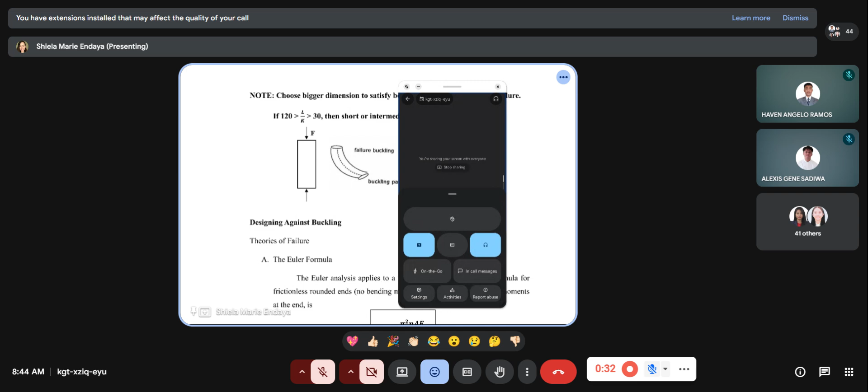Okay, so ngayon naman ay dito tayo sa torsional. Napaparinggan po ba ako? Clear po, ma'am. Okay, so dito naman, ang atin na naikot yung body.

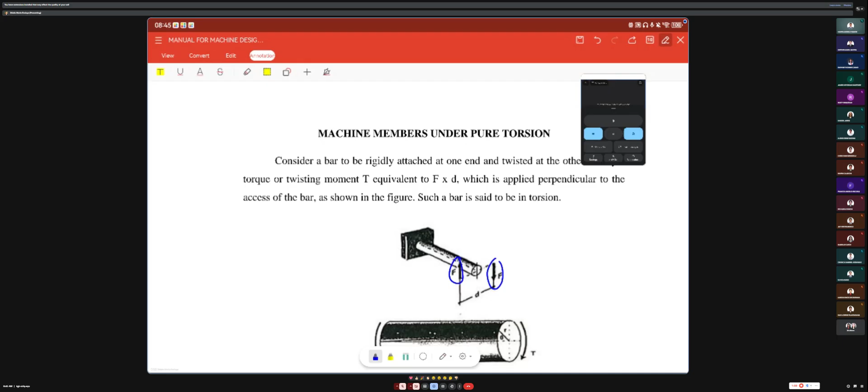So consider a bar to be rigidly attached at one end and twisted at the other end by a torque or twisting moment, equivalent to force times distance. Yung ating force ay couple, magkabilaan with the same amount or same magnitude, and which is applied perpendicular to the axis of the bar as shown in the figure. So such a bar is said to be in torsion.

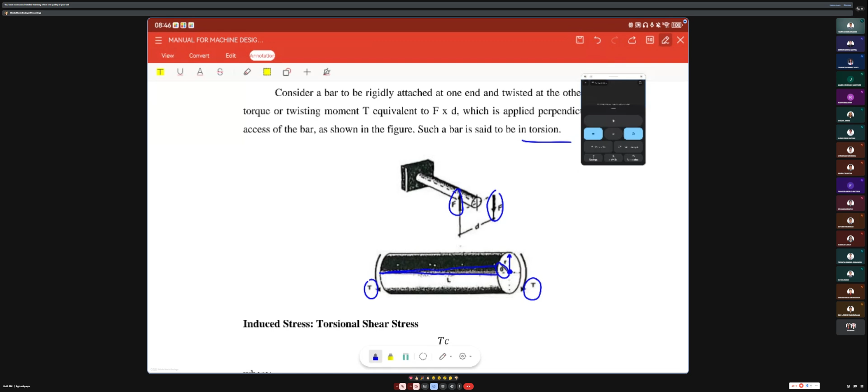So kapag natin yan, kapag twist natin, dito magkakameron tayo ng deformation. So given ito, yung T natin is the torque, then yung length of the bar or rod, tapos itong angle na ito, yan yung ating theta. Tapos yung R naman, edi yun yung radius ng bar. Okay, so dito we have the induced stress formula for torsional.

Ang gamit na po natin dito is yung shear stress, o kaya yung kung tawagin natin ito ay tau. So shear stress is equals to TC over J. T for torque, C for the radial distance, and J for the polar moment of inertia.

So then, meron din tayong design stress. Ito yung i-equate natin mamaya. For a good design, equate natin yung induced stress dun sa design stress.

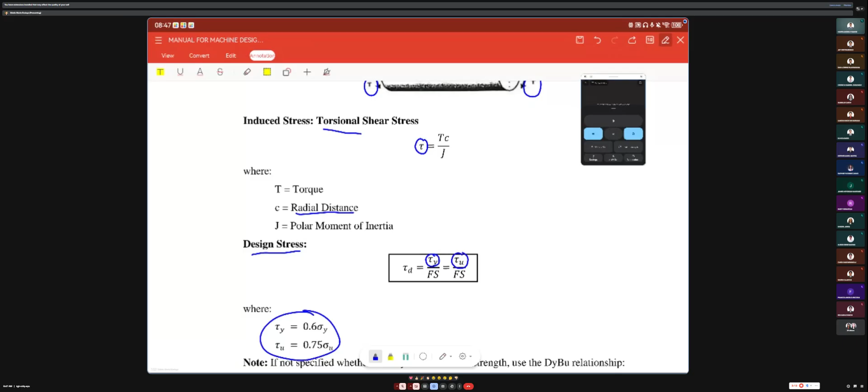Kung dun sa previous natin na topic, yung tension and compression, ang gamit na natin ay shear stress. Ang relation ng shear stress doon sa ultimate stress or yield stress is that ang atin na yield shear stress is equals to 0.6 stress Y, o ito naman na ultimate shear stress is equals to 0.75 stress U.

So ito tatandaan natin. Kasi yung table, ang pwede lang natin doon makuha ay itong ultimate at yield stress. So kailangan pag ililipat natin siya to shear stress, gagamitin natin ito.

So note that if not specified whether to use yield or ultimate strength, use DYBU. Ang ibig sabihin po ng DY? Kapag ductile, use yield stress. Kapag brittle, use ultimate stress. Nagigets po? D Y, ito ay ductile. Ito naman ay yield. Ang B for brittle and U ay ultimate.

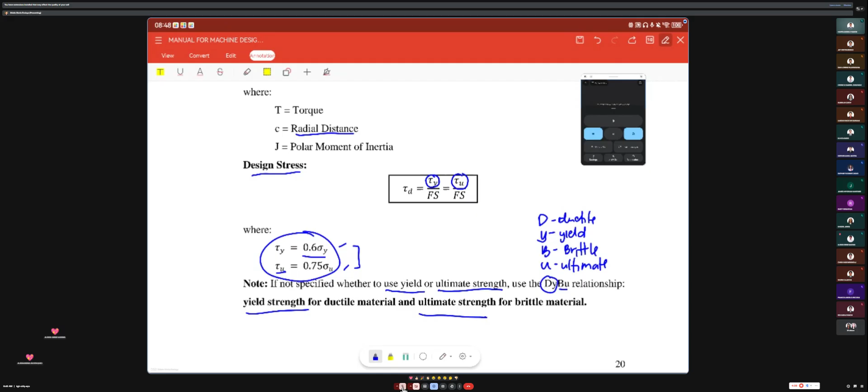If not specified sa problem. Nakukuha po ba? Yes po ma'am, nakakukuha po. Okay.

Next, strength failure. For a good design, equate nga natin yung design stress sa induced stress. Ang ating induced stress for solid materials, so we have the TC over J. C since radial distance or yung radius, so D over 2. And ang polar moment natin is pi D to the 4th over 32.

So kung isi-simplify natin ito... yes, hindi nagsasagot. Good morning po, ma'am. Wala pong naka-present po.

Okay, so yun nga, ang ating C is equals to D over 2 and J is pi D to the fourth over 32. So simplify lang naman natin yan, kasi ito ay magiging T, then C, D over 2, then ang J, pi D to the fourth over 32.

Okay, so simplify natin, di ba ito, makakancel ang D, magiging ito ay magiging 3. Then yung 32, magiging ito, di ba yan? Yung 32 divided by 2, edi ito ay magiging 16. So kaya 16T over pi D cube.

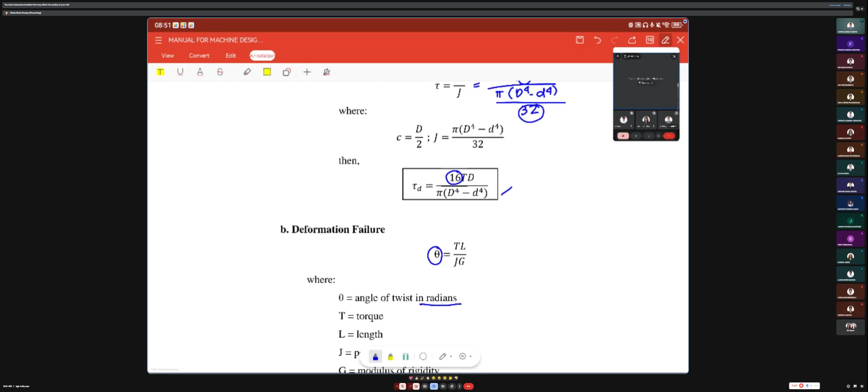So next is the deformation. Yung angle, yung angle of twist, dapat siya ay naka-radian. Then ang TL, T for the torque, L sa length, original length, J, polar moment of inertia, and G is the modulus of rigidity.

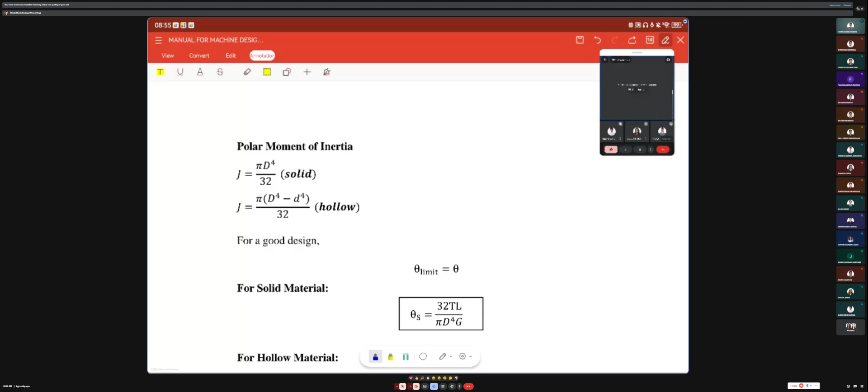So, patayin tapos yan. Ang formula nga natin ng deformation is equal to TL over JG. Yung J, ito naman yung kanina natin. And then, for a good design, ganun lang din, yung ating na deformation limit is equal to the deformation na ito, TL over JG.

So for solid materials, ang ating na deformation ng angle of twist is equal to 32 TL over pi D to the fourth G. Ito ay manggagaling ito, iyan naman ay dahil din sa J, yung J for solid materials.

Tapos for hollow materials, palagyan na lang ng parenthesis ito, itong D to the fourth minus small d to the fourth.

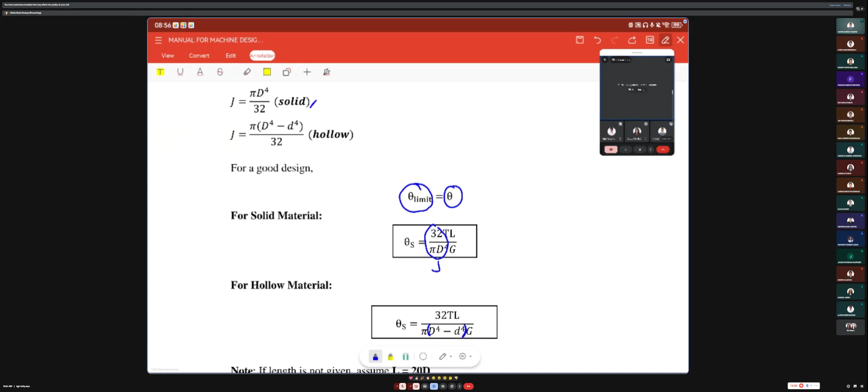If length is not given, assume L equals 20D. And if not in the table of properties, use G equals 12 times 10 raised to 6.

So the power formula, we use this in computing power, or when finding torque given the power and speed. These are our units in SI: power is in kilowatts, torque is in kilonewton-meter, and N is in RPM. So if power is in kilowatts, N is still in RPM. But we use this formula: 2 pi T N over 60.

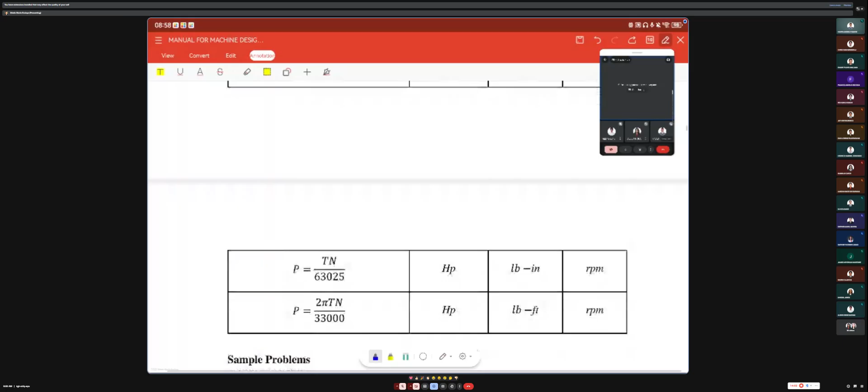For English units, we use 2 pi T N over 33,000. This is what we commonly use. Here the unit for power is horsepower and N is RPM. So torque is in pound-feet, then we convert the feet to inches later. That's how it's done.

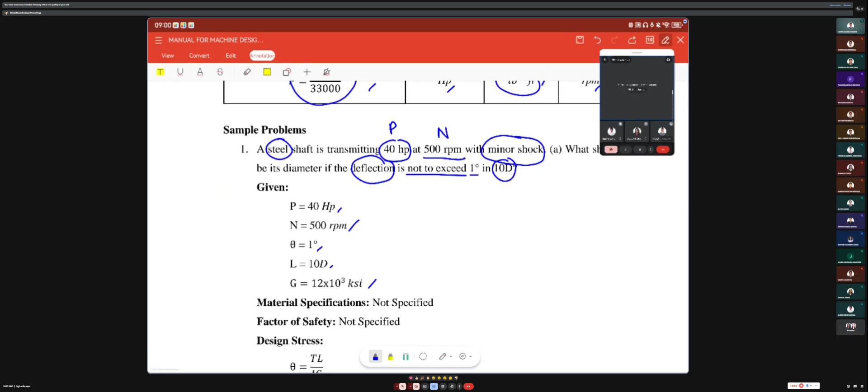Our limit for deformation or angle of twist is 1 degree. Then it's stated that length is 10D. G is 12 times 10 since it's not stated in the problem, so we use 12 times 10 raised to 6 PSI or 10 raised to 3 KSI.

So we need to find the diameter, capital D. Material specification: nothing specific stated, but it's steel, so no specified characteristics. Next, design stress: from the given, we can use our formula, angle equals TL over JG.

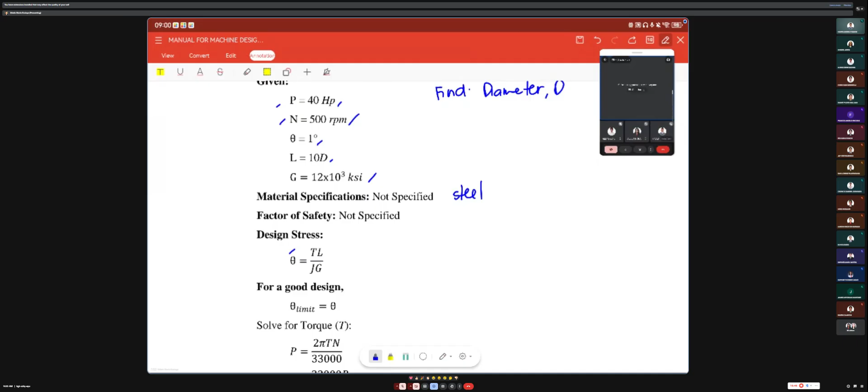For a good design, we equate our limit, which is 1 degree, to TL over JG.

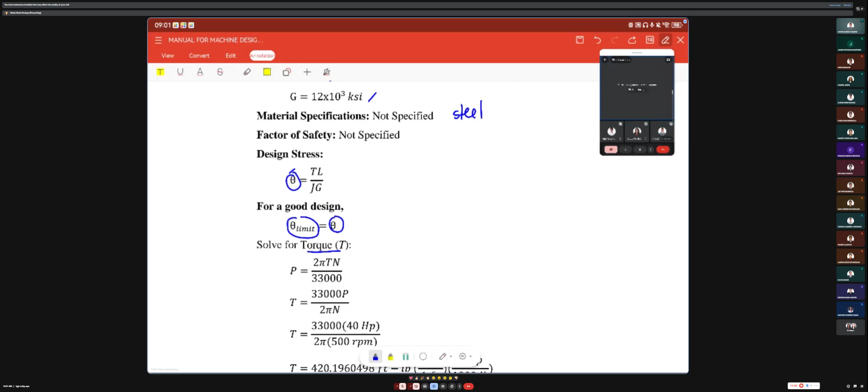So let's compute the torque first using the power formula: 2 pi T N over 33,000, since we're in English units, and given is HP. So T equals 33,000 times P over 2 pi N. That's 33,000 times 40 HP over 2 pi times 500 RPM.

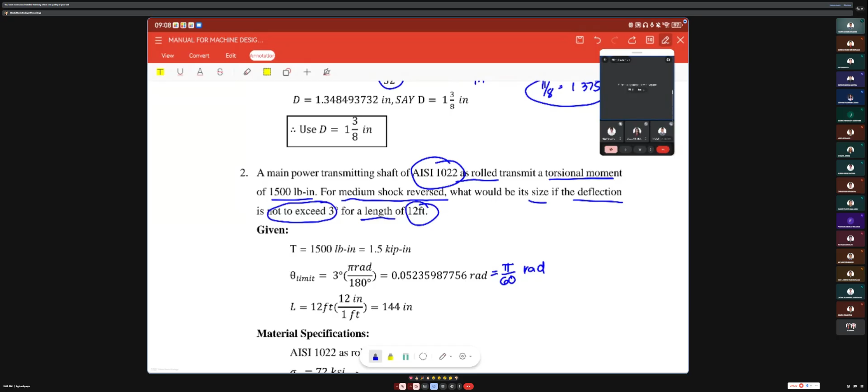Tapos, yung ating na length is 12 feet, so convert natin to 144. So, find size. Or ang size na tinutukoy dyan ay yung diameter.

So, material specifications, AISI 1022 as rolled. So, titingnan natin sa table. Ano? 1022.

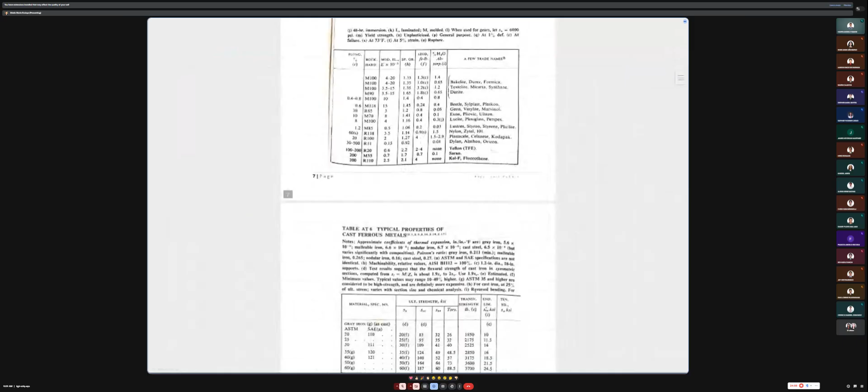Nag-represent pa ang screen. Yes po, ma'am. Nagpe-present. Sana wala kayo sa screen.

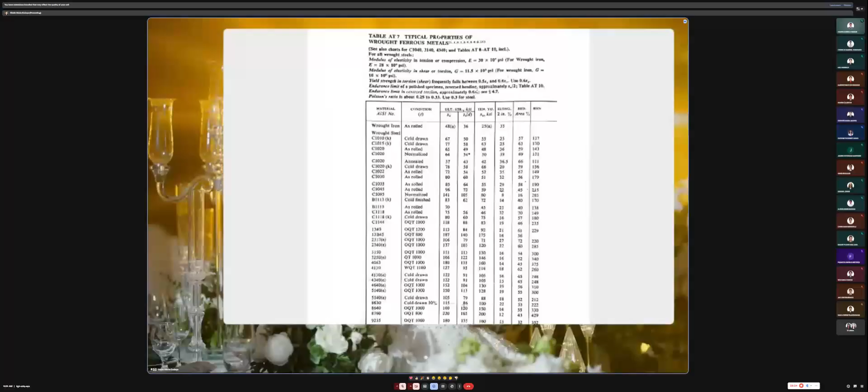Okay, so sa table, so nandito yung AISI, ano ang tinatanong? AISI 1022. Ito yan.

C1022 as rolled. So, ang ultimate stress natin is 72. Then, 52 ang yield stress. Nakita po ba?

Tapos, sinabi dito, makikita niyo rin, modulus of elasticity in shear or torsion. Yan, so kapag sinabi natin modulus of elasticity in shear, tapos torsion, yung modulus of elasticity. So, G is equal to 11.5 times 10 raised to 6 PSI.

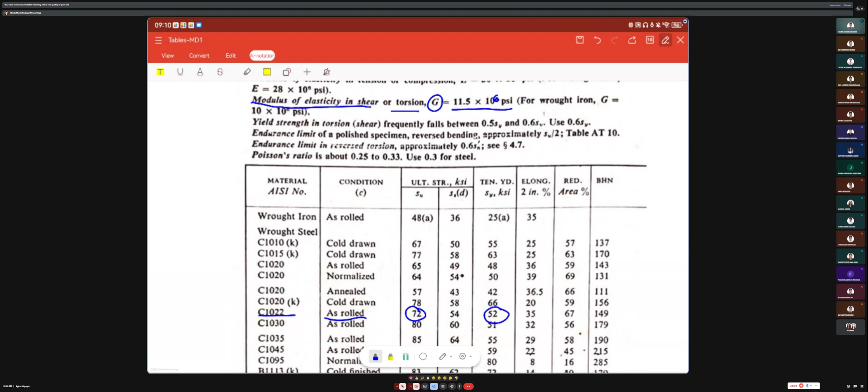Anong page po yan sa inyong table? 15. 15 po, i-correct nyo na ng bilang. Okay, so gagamitin po natin yan yung 72, 52, and 11.5.

Okay, so yon. And then, the factor of safety. Factor of safety natin, sabi medium shock reverse, then ductile because yung 22, then based on yield stress. Wala kasi sinabi sa problem, pero sabi na natin, not stated, gamitin natin yung relation na SY, SU. So, since ductile, so based on yield.

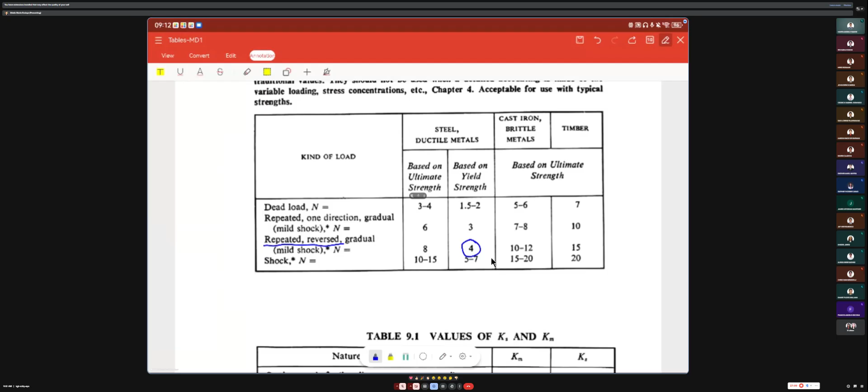Sa table 1.1 ninyo, ano po ang ating factor of safety? Sabi ay repeated reverse, so kaya kung based on yield strength, ang ating factor of safety is 4. Nakita po? Nakita po, ma'am. Talaga.

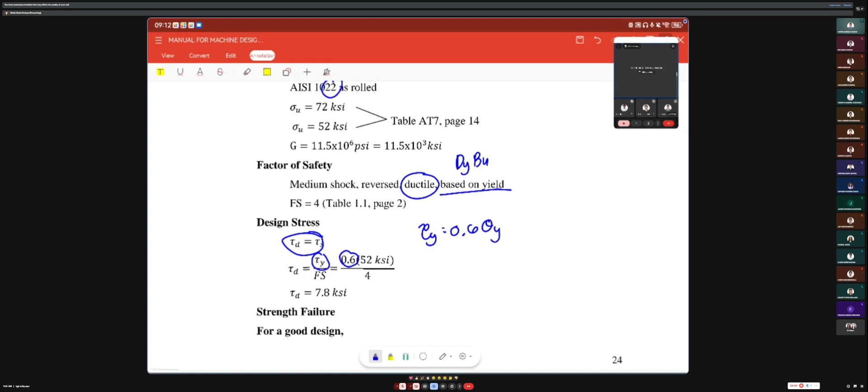Okay, so then, design stress. Equate naman natin itong design stress D equals sa ating na stress. So, since naka-base tayo sa yield stress, so tau y over Fs. Ang tau y na is equal to 0.6 stress Y, yield stress, yung relation natin. Kaya meron tayo dito ng 0.6 times yung nakuha natin yield stress na 52, divided by 4. So, we have now yung design stress na 7.8 KSI.

Sunod, strength failure. So, for a good design, ang design stress ay equals to 16T over pi D cubed. So, i-equate na natin yung design stress doon sa torsional stress, which is ang design stress ay equal sa yield stress over Fs. Then, ang ating naman na tau ay equal sa 16T over pi D cubed. So, pag pinag-equal natin, ito na for solid material.

So, yung nakuha natin kanina na value ng design stress, 7.8 KSI or kip over inch squared, equal to 16. Then, ito naman ay given. Then, D cubed, so cancel ang kip. So, ang D, ito po ang nakuhang value ng D. Tama ba? Ang value?

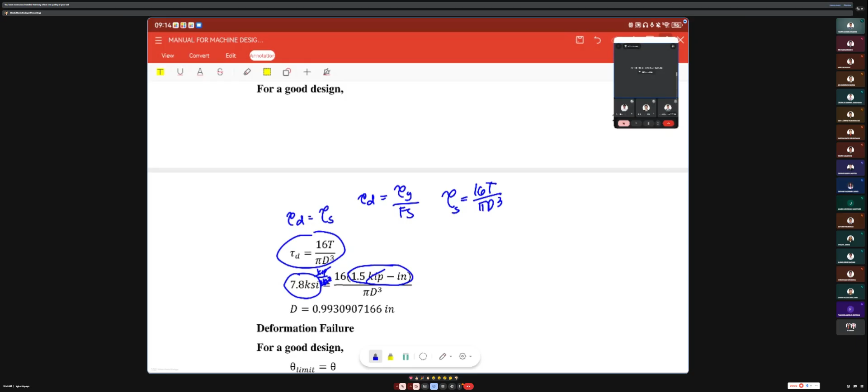Yes po, ma'am. Okay. Then, to the deformation failure for a good design, tignan natin yung limit. Ano? Doon sa atin na TL over JG.

So, we have yung atin na pi over 60 rad, which is 0.052 something. Then, TL over JG. So, T is 1.5. Ang L natin from 12 feet, pwede naging 144 inch. Then, ang J natin na pi D to the 4th over 32. Then, ang G nga natin, yung galing din sa table, is 11.5 times 10 raised to 3 KSI. So, cancel ang G. So, D, anong value ng D?

Oh, anong value? Tama po ba? Tama daw, baka may maling mga decimal ulit mo. Okay, so dalawa yung nakuha nating value ng D. So, choose higher D, which is ito.

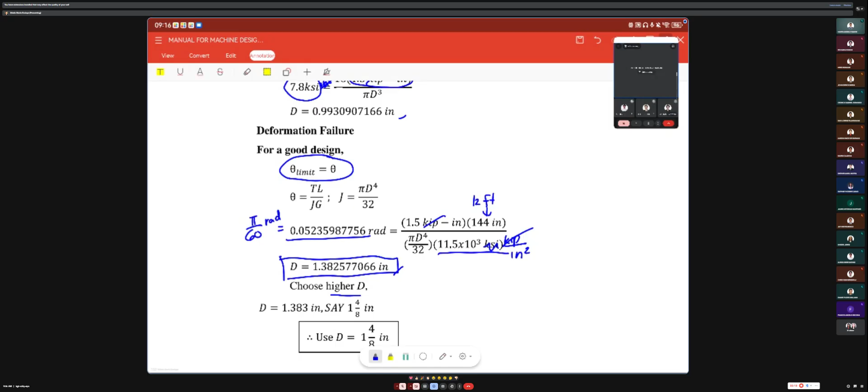So, again, anong gagawin natin? Dito ulit sa papatak sa 1/8 between 7/8. Kanina, nakaano na tayo ng 1.375. So, ituloy na lang natin to. 11/8 plus 1/8, so 3/2 na. 1.5. Ano sagot natin?

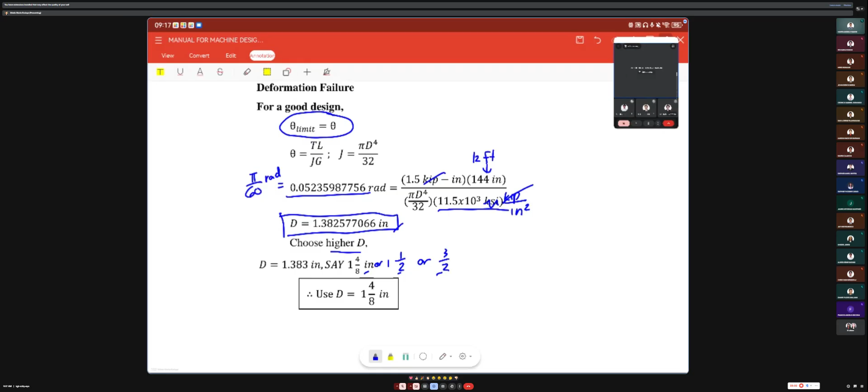Okay? One. Wait lang.

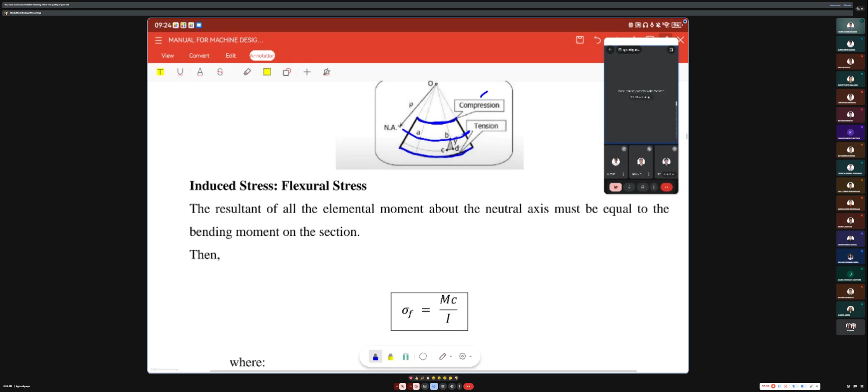A little consideration will show that when a beam is subjected to bending moment, the fibers on the upper side of the beam will be shortened due to compression, and those on the lower side will be elongated due to tension. So it may be seen that somewhere between the top and bottom fibers, there is a surface where the fibers are neither shortened nor lengthened - that's what we call the neutral surface.

The intersection of the neutral surface with any normal cross-section of the beam is known as the neutral axis.

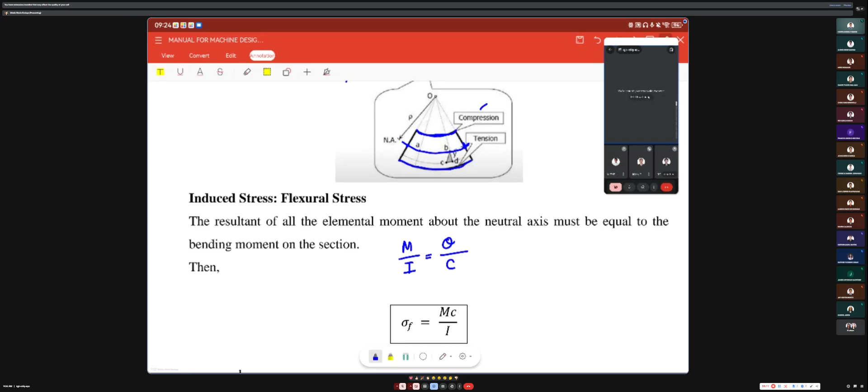So we can derive the bending equation: M/I equals stress over C, which becomes this form, or equal to E over R. Here, E is the Young's modulus or modulus of elasticity.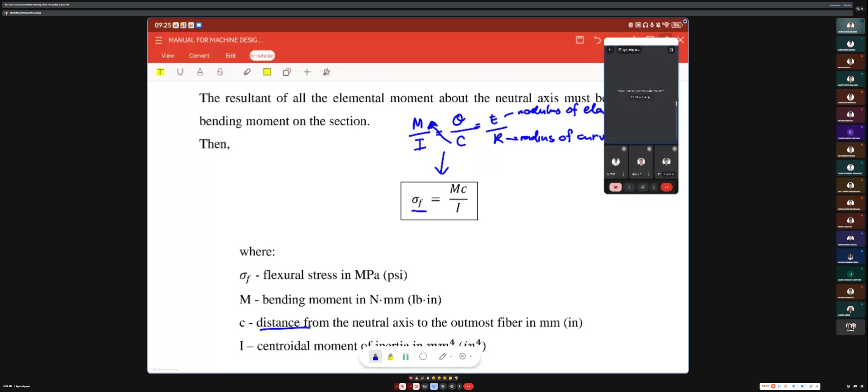And R here is the radius of curvature. So our stress here is the flexural stress or bending stress, equal to MC over I - we just multiply by C. M is the bending moment, C is the distance from the neutral axis to the outermost fiber, and I is the centroidal moment of inertia in millimeter to the fourth, or what we call the moment of inertia.

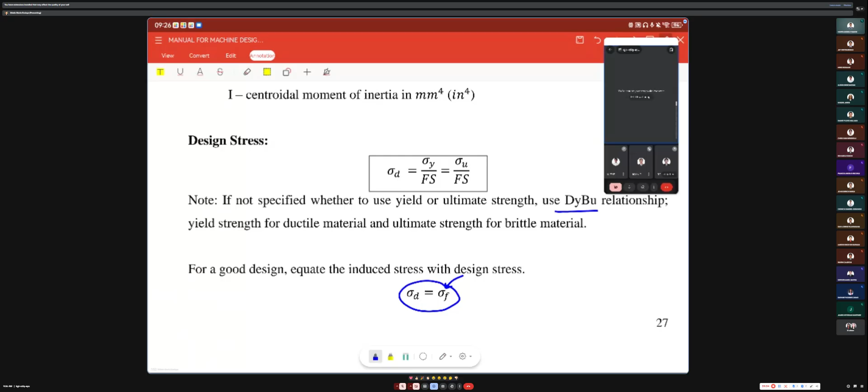So, design stress - same principle. We equate our design stress to stress Y over Fs or stress U over Fs. If not specified, this is still the relation we use. For a good design, equate the induced stress, which is our flexural stress, with design stress: stress Y over Fs equals stress U over Fs equals MC over I.

So we have types of beam. Beams are horizontal members made of different materials that carry loads and distribute them to their supports. Due to the exertion of loads mostly perpendicular to their axis, bending is the primary mode of deflection. The following are the different types of beam.

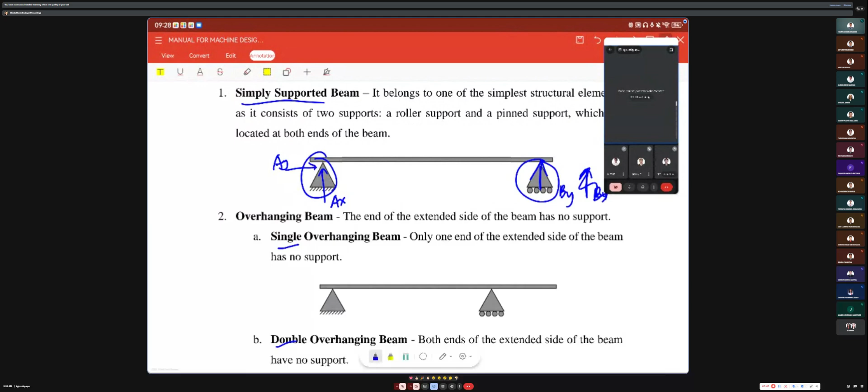For overhanging, there's single and double. For single, only one side overhangs, while for double, both ends of the extended side of the beam have no support. For cantilever, one side is fixed.

This type of beam is typically supported by a single fixed support located at one end. For cantilever, the equivalent is two forces plus a couple moment.

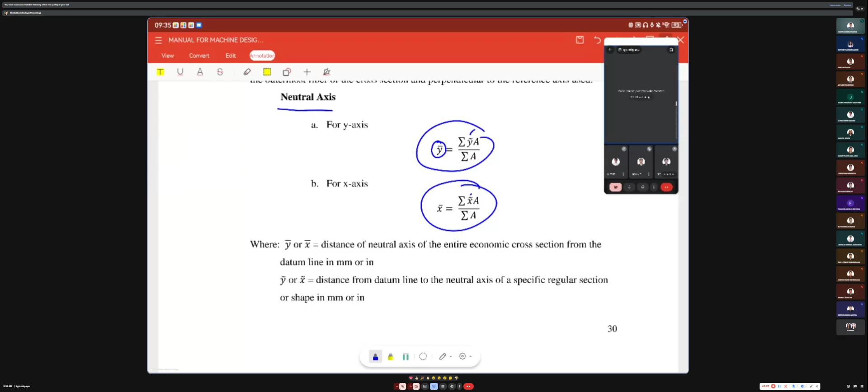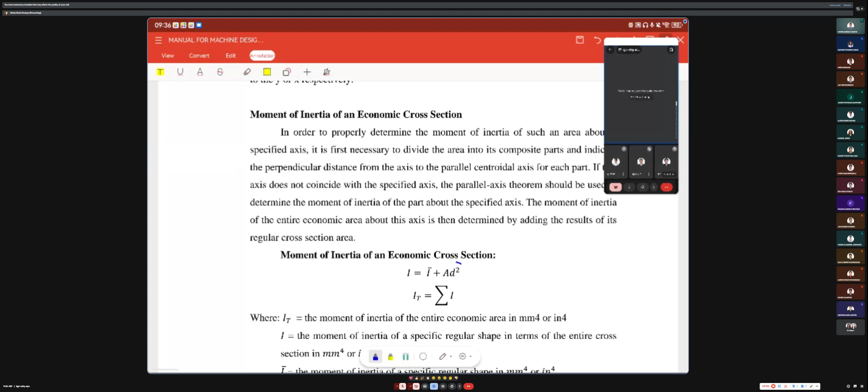So, next, moment of inertia of a composite cross-section. Dito sa statics, umabot ba kayo dito? Chapter 10 na ito. Ito yung last topic sa statics. Hindi na po matandaan, ma'am, kasi ilang taon na.

Ay siya, edi yan po yung formula. Yung atin na moment of inertia is equals to I bar plus AD squared.

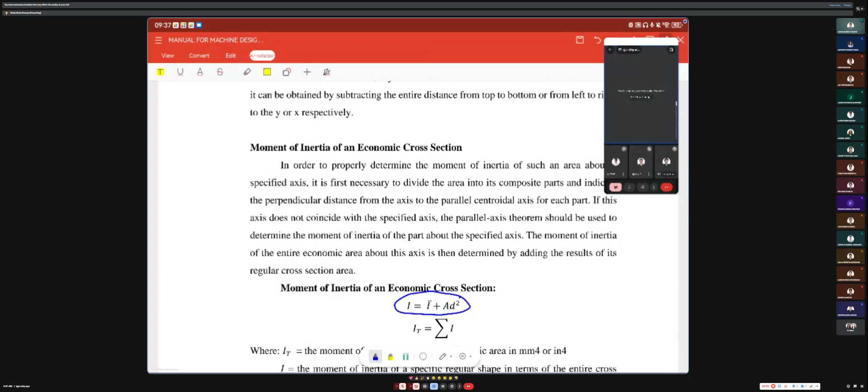So, in order to properly determine the moment of inertia of such an area about a specified axis, it is first necessary to divide the area into its composite parts and indicate the perpendicular distance from the axis to the parallel centroidal axis for each part. If this axis does not coincide with the specified axis, the parallel axis theorem should be used to determine the moment of that part about the specified axis. So the moment of inertia of the entire composite area about this axis is then determined by adding the results of the regular cross-sectional areas.

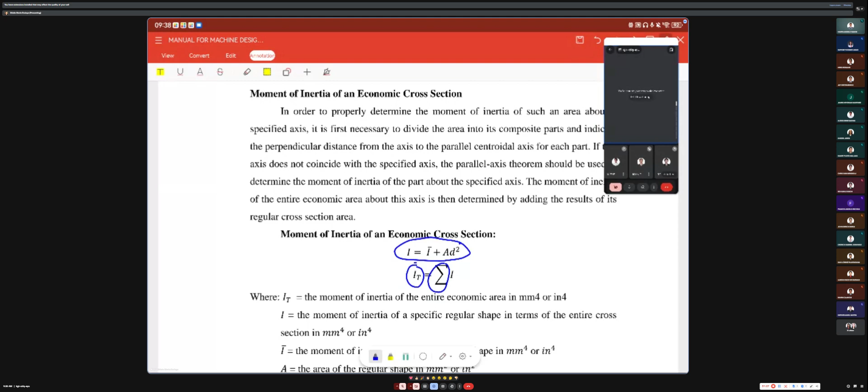So kaya ito po yung naging ating equation. Kapag hinahanap natin, ito'y para lang dun sa isang seksyon. Pag lahatan na, summation na nung ating moment of inertia. So, IT is the moment of inertia of the entire composite area. I lang kapag moment of inertia of a specified regular shape in terms of the entire cross-section. I bar is the moment of inertia of a specific regular shape.

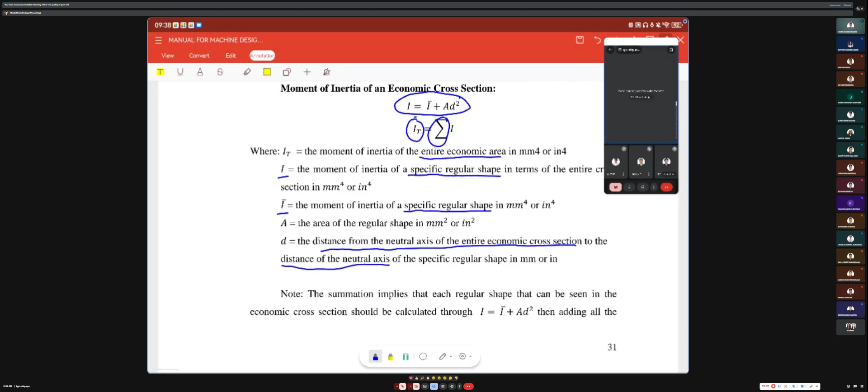And then A is the area of the regular shape. Then D is the distance from the neutral axis of the entire composite cross-section to the neutral axis of the specific shape.

Kunwari dito, burahin na natin para hindi malito. So, alin dito po yung D? D1. Katulad dito, ito yung neutral axis natin na nakuha. Kung kukunin natin yung D nung cross-section 1, so ito yon. Ito daw yung layo nung centroid ng ating 1 dito sa neutral axis.

So yung 2 natin, saan equal sa tingin nyo? Iisa yung neutral axis niya at yung centroid, so 0. So yung 3, kung ito ang section 3 natin, so ito naman ang kanyang distance. Okay? Yun daw yung layo. Naintindihan? Yung D?

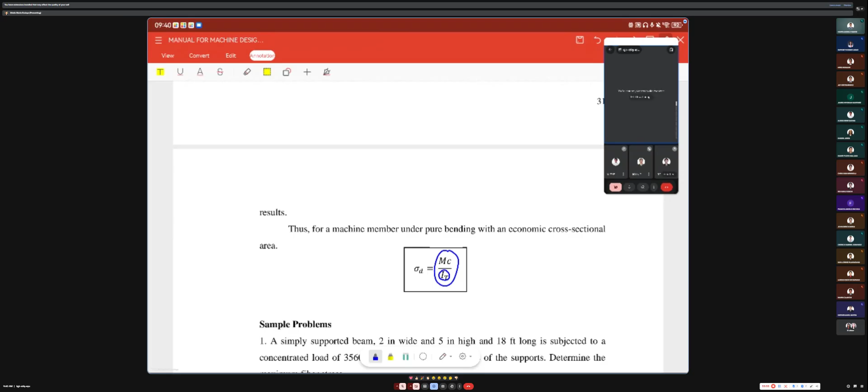Note, the summation that each regular shape that can be seen in the composite cross-section should be calculated through I equals I bar plus AD squared, then adding all the results. Thus, for a machine member under pure bending with a composite cross-section area, magiging MC over IT. So yung ating moment of inertia dito is total na. Pag composite cross-section, composite bodies siya. Pero kung solid naman siya, isa lang na shape, edi I lang yan.

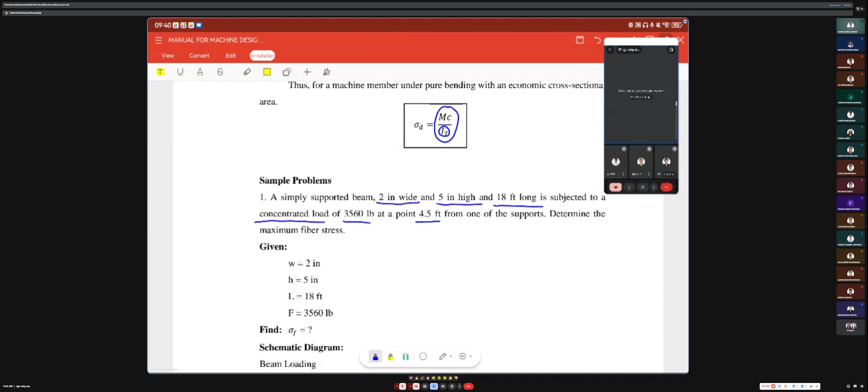Sample problem. A simply supported beam, 2-inch ang wide, 5-inch ang height, and 18 feet long, is subjected to a concentrated load of 3,560 pounds at a point 4.5 feet from one of the supports. Determine the maximum fiber stress, or yung tinutukoy niyan is yung stress F. So, ang given natin, yung width, height, yung length, yung force, then ang hinahanap natin is yung stress F.

Sabi dito, yung 3,560 daw ay located 4.5 feet from one of the supports. So dito natin nilagay, 4.5. Next, yan yung schematic diagram natin. Yung beam cross-section, kapag hinarap natin yan sa atin, ang kanyang height is 5 inch and ang width niya, o wide, is 2 inch.

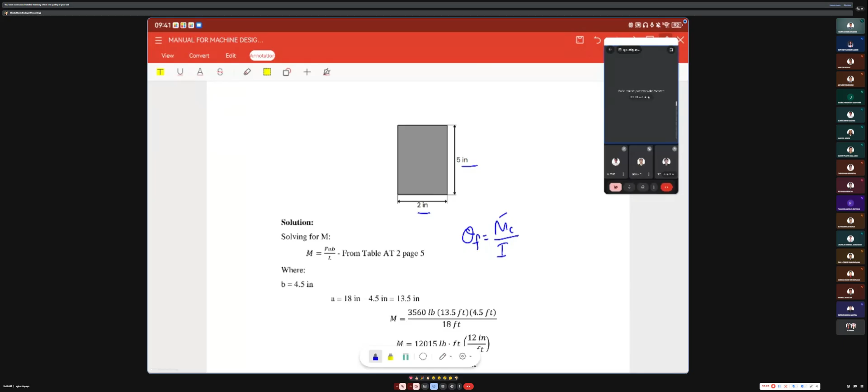So, for the solution, we have ito. Solving for M, kasi nga, ang formula natin is MC over I. Saan natin kukunin yung M? Dito sa inyo na table, ayan, ang pagkuha natin ng M, ito, yan. So, ang M po natin ay FAB over L. Ito na yun.

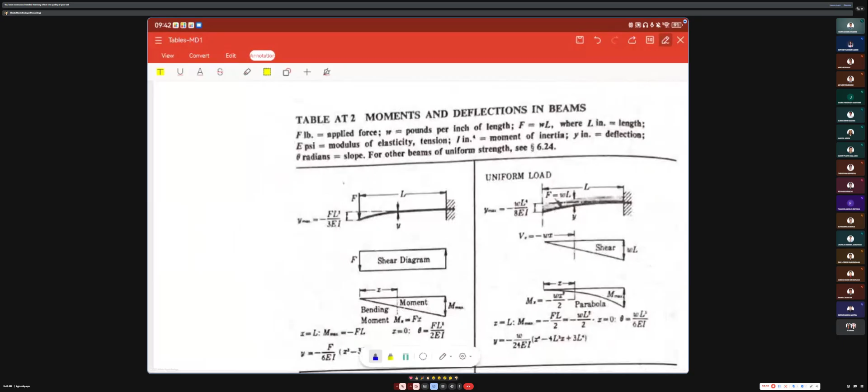Kung dalawang support, ito yung... ito nga yan. FL, ang maximum moment natin is FL over 4. Okay? Ayan. Kasi ito yun eh. Simple supported.

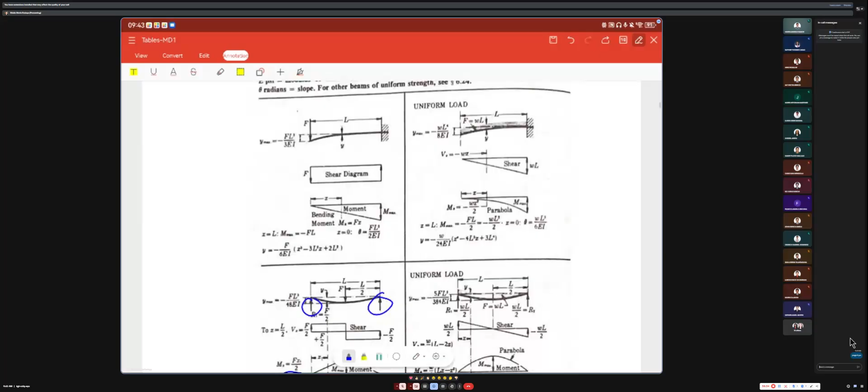Okay? Ayan. Ito kasi ay for cantilever. Ito din, cantilever din to. Ito naman kapag uniform load, kapag ang load mo ay lahat ng buong beam may load ka. Ito kapag may concentrated load ka lang. So kaya yung M max mo ay FL over 4.

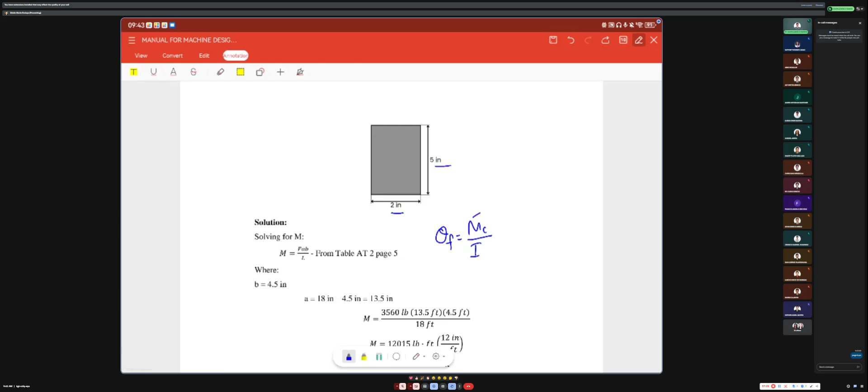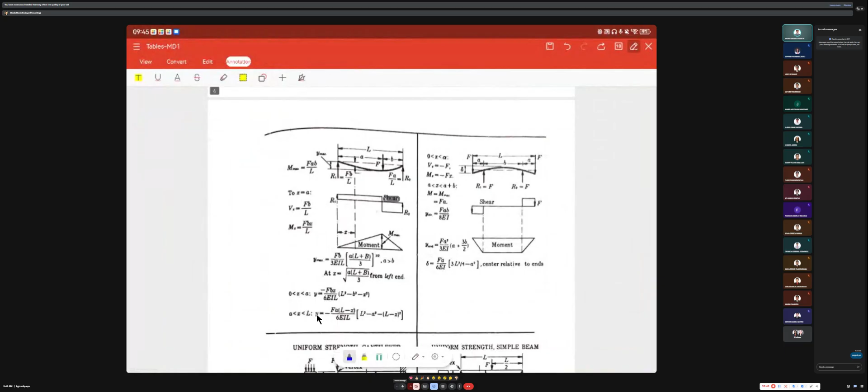FL over 4. Where L natin... ito. Hello? Yes. Ito nga. Ito. Ayun.

Kasi ito pala ay kapag ang load ay nasa center, kaya naging FL over 4. So pag dito, pag wala sa center, ang susundin natin is FAB over L.

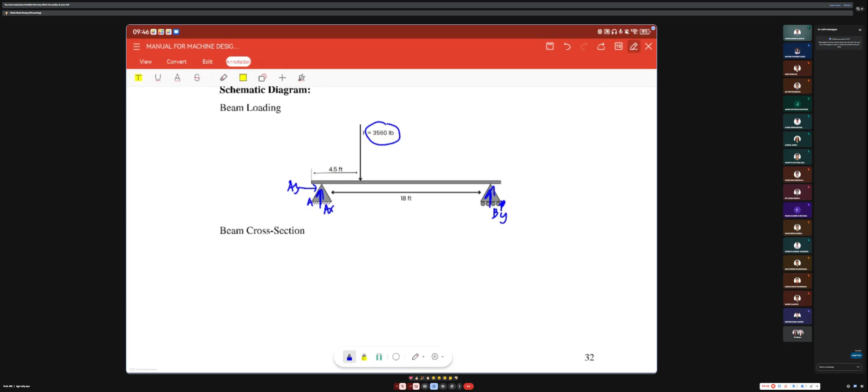Pero syempre, since meron na kayong table, pwede na ito na lang yung gamitin ninyo. So yung FAB over L, where yung atin na B is 4.5. Ito po yung 4.5. Then ang A natin ay itong layo, yung tira. Kung 18 ito, minus yung B na 4.5, so 13.5 feet. Inch pala, feet. Ano bang given? Feet. Feet to feet.

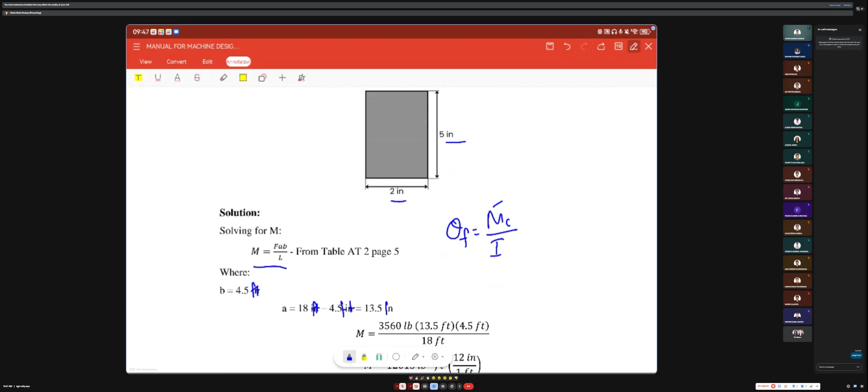Ang liit naman ng beam kung ganyan. So, 13.5 feet, then 4.5 feet. So, yung overall na length niya is 18. So, ito, cancel natin yung feet, so maging 12,015 pound-feet.

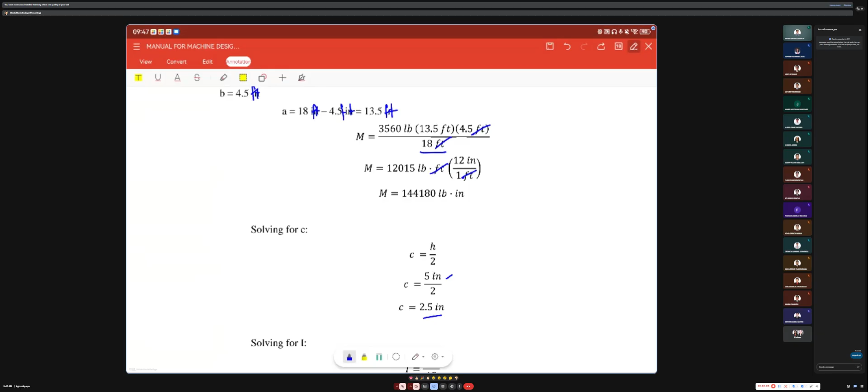Then, i-times natin ng 12 para maging inch. Then, solving for C. Since rectangular yung ating beam, so ang C natin is H over 2. Ang H natin is 5, over 2, so 2.5 inch. So, meron na tayong C.

Sunod naman natin is the moment of inertia. So, pag rectangle nga, ang I natin is bh cubed over 12. So, 2 inch tapos times 5 inch cube over yung 12. So, 20.833 inch to the fourth.

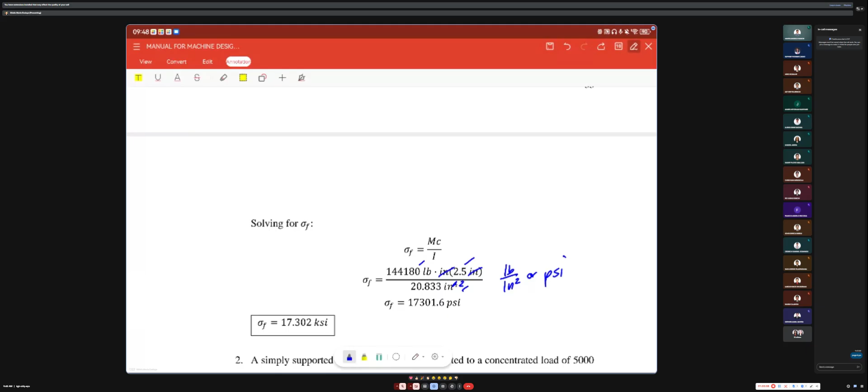Then, direct sub na lang natin yung nakuha natin kanina na M, C, then I. Dito makakancel yung inches squared, ito magiging pounds per inches squared or PSI. So, ang ating final answer is 17,301.6 PSI, o kaya 17.302 KSI. Nakuha po?

Nakuha po, ma'am. Okay. Kaya mo natin ito.

So, next meeting na lang to, kasi baka kulangin tayo sa oras. Pero try nyo na lang din sa inyo kasi ito ay composite or eccentric cross-section. Pero letter T lang naman, simple lang.

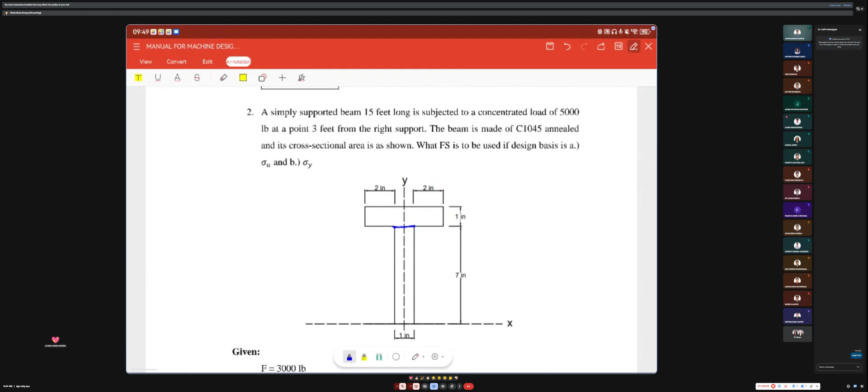Okay? So, parang dito, ang total nito na haba is 5. Mas madali kasi kung hahatiin mo siya ng dalawa lang. Ito ang section 1, then ito yung section 2. So, hahanapin ninyo dyan yung neutral axis. So, next meeting na lang natin itong i-solve.

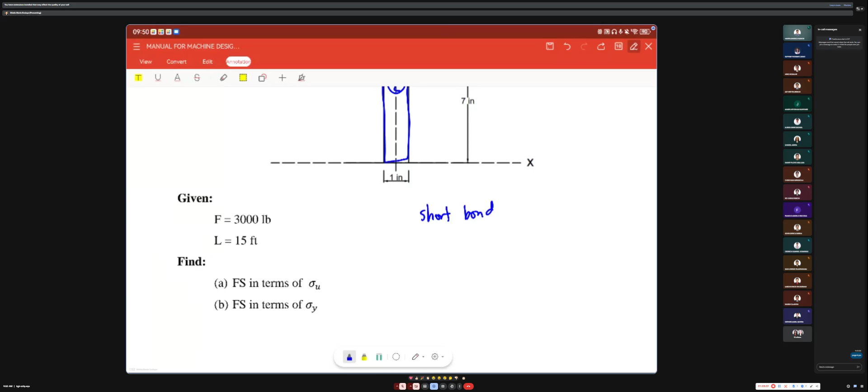Okay. So, nga pala yung kahapon na tanong ninyo, paano yung magiging format? So, ito po, short bond paper. So, engineering lettering ha, so not necessary na capital letter. Hindi pag sinabing engineering lettering ay capital letter, pwede din po na yung sentence case, yung may capital and yung hindi.

Wag lang i-capital yung mga kawari force. Ay, wag i-capital, wag i-small yung force like that, or yung L kung length. Pati yung iba kasi kina-capital din, pati yung unit. Hindi rin po dapat siya ay, kung small letter lang siya, kasi ibang unit na yon. So, yun, tapos visible.

Visible yung inyong border, 1.5 inch sa left, tapos 1 inch sa top, right, and bottom. And box your final answer.

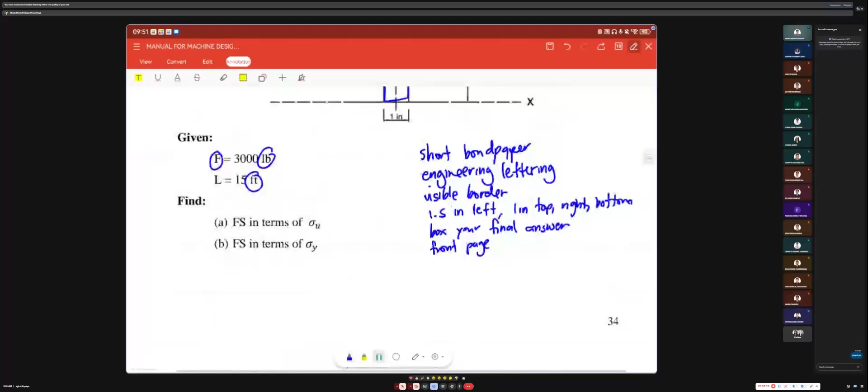Okay? So, meron din na front page yan ha, yung Republic of the Philippines, Batangas State University. Tapos, kung kahit nakalagay dyan design work number 4, kasi considered na rin siya, pag pinagsama-sama nga natin siya, yung kung hanggang saan yung topic natin na makover hanggang midterm, design work number 1 na lang siya. Considered lang siya na isang design work.

So, yun ang gamitin nyo lang na title, design work number 1. Bali, dalawa lang yun, yung sunod ay yung sa final. So, yun. Show your complete solution.

So, complete solution ha, with unit analysis or cancellation. Do not round off yung ating mga sagot. Within the solution, saka lang kayo mag-round off kapag final solution na. So, kapag ang tinatanong ay dimensions, kailangan siya ay yung naka-fraction, yung preferred size.

Okay? Ano pa bang kulang? Ano pa sa tingin niyo ang kulang ko?

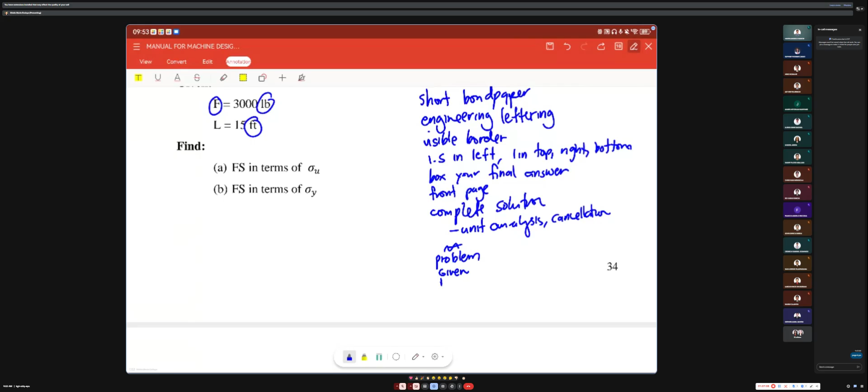Yung format pa. So, problem, given, find, schematic diagram, then solution. So, yung solution, nandyan na yung material specification. Yung katulad niyan, pagkakasunod-sunod, yung design stress, factor of safety. Ito ay kung meron ha.

Tapos yung design stress, ano pa? Deformation. Pwedeng magkabago-bago ito ha, depende dun sa inyong solution sa problem. Pero yan.

Tapos, yun lang, box your final answer. So, bale, ito, problem, given, find, schematic diagram, and solution. Nakuha po?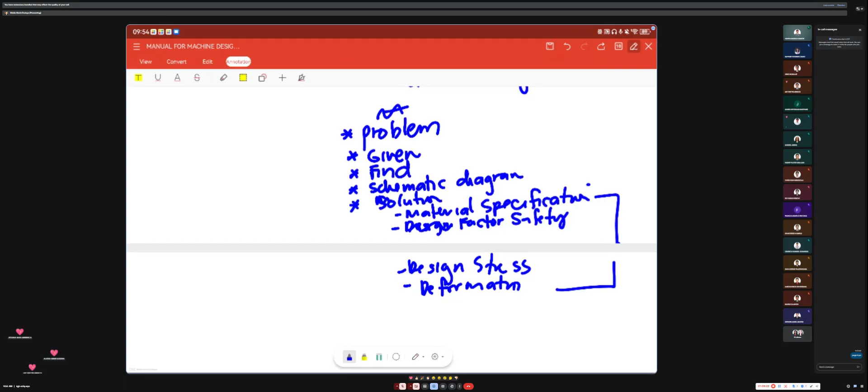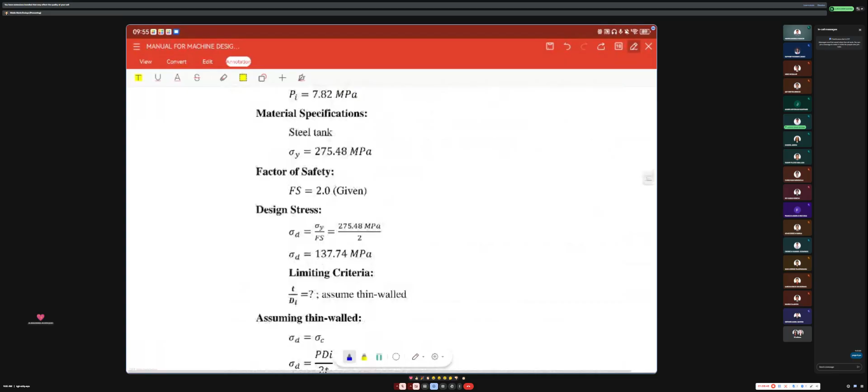Okay, yan. So, simulan nyo na ang pagsusulat at pag-aaral kasi nasa week 3 na tayo. So, week 4 ay sana matapos tayo, nasa pressure vessels. Kasi dun sa syllabus, ang ating scope ay hanggang dito pa sa variable stress analysis without stress concentration. So, not sure if aabot pa tayo. Pero sure ako dito sa pressure vessel, kaya natin. Maiksi lang naman tong pressure vessel. Kasi week 5, prelim nyo na. So, kaya mag-start na kayong mag-aral din. Kaya, sagutan nyo na yung mga design work, para review na rin sa inyo. Okay po?

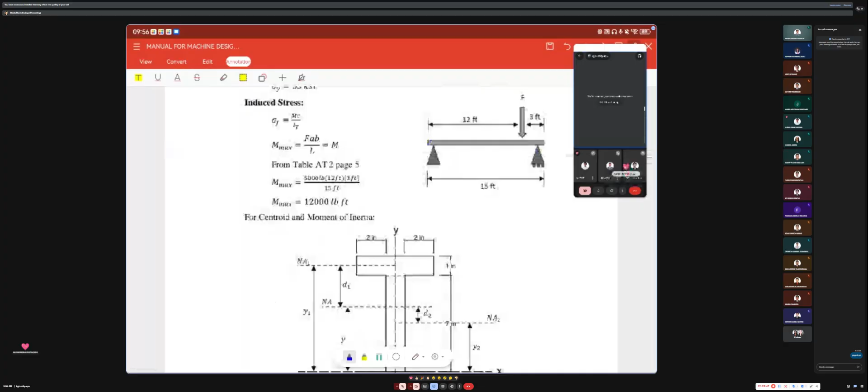Ma'am, good morning po, itatanong lang po sana yung para po sa numbering ng design work, di ba po, pagsusunod-sunod na lang po din namin, ma'am. Oh, pero mas maganda siguro meron kayong isang page nakalagay doon ay kung anong topic. Kuwari, machine members, di ba may topic na nakalagay dito? For example, ito, yan, machine members under, ano yung una natin? Para lang kita natin yung separation.

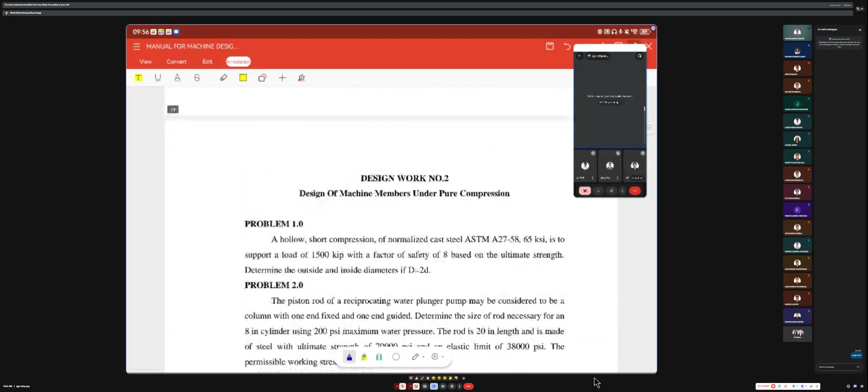Noted po, ma'am. Machine members under pure tension. Sunod naman, machine members under compression, torsion, bending, at kung yung pressure vessel. Okay? Ano pa po ang question? Wala na po.